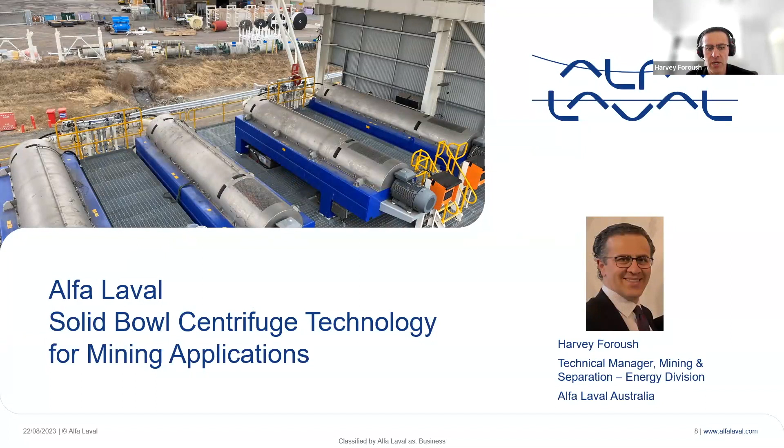Thanks, Tammy, and thanks, Austmine, for this opportunity for Alfa Laval to present our solid bowl centrifuge technology. Let's get started. My name is Harvey Foroush. I'm the technical sales manager for Alfa Laval Australia in the Energy Division. I'm based in Brisbane, and I will walk you through our technology for mining applications with a focus on tailings management.

Given the subject of today's webinar is focused on smart mining, I just want to walk you through how we can manage tailings in a smart way. You can either manage the thickener underflow for your tailings through Alfa Laval solid bowl centrifuge. In that case, you can recover more than 80% of the water and remove the solids from that slurry. Or you can do the traditional way and just pump it into a tailings dam. You can't recover the water, and you will lose a huge amount of water. It will add cost to the operation and also the rehabilitation of the mine at the end of its life.

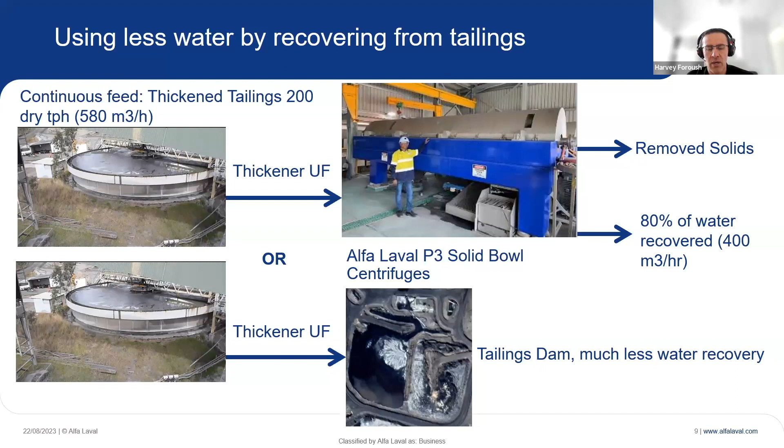So next slide, just a quick overview of the agenda today. Today's agenda will include focus on water and circularity for tailings management and how Alfa Laval centrifuge technology could help the mining industry achieve sustainability targets and reduce environmental impact. I'll walk you through a quick introduction about Alfa Laval, who we are and what we are doing in Australia and globally in the mining industry, what a solid bowl centrifuge is and how it could help the mining industry, the wear protection package in our centrifuges, and also our existing installations in Australia and globally. And at the end, a quick case story of red mud dewatering that we are doing at the moment in Queensland.

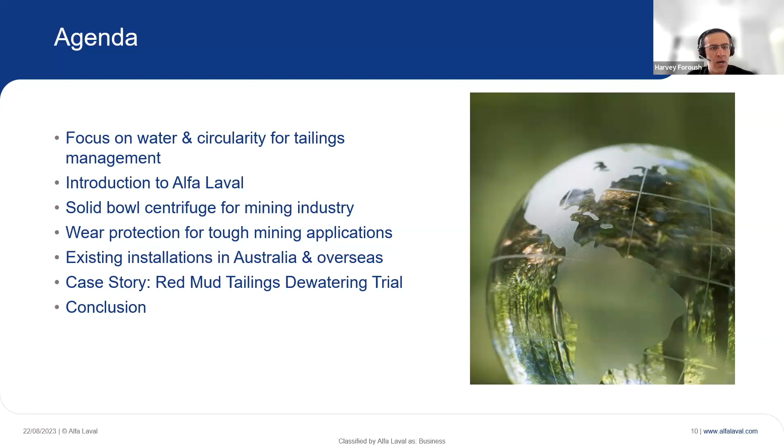So let's get started.

Circularity is on everyone's mind, and optimized water and resource management plays an important role in driving this transformation. Resource efficiency not only improves the sustainability of the operation, it can also be a smart way to cut costs and improve safety. Separation technology for tailings dewatering maximizes the reuse of process water. This is particularly important in areas where water scarcity is a growing problem. Better water management contributes to social license. We also need solutions for tailings ponds reaching capacity, as licenses for new tailings storage facilities are harder to come by.

Let me show you the latest technology innovation for better tailings management.

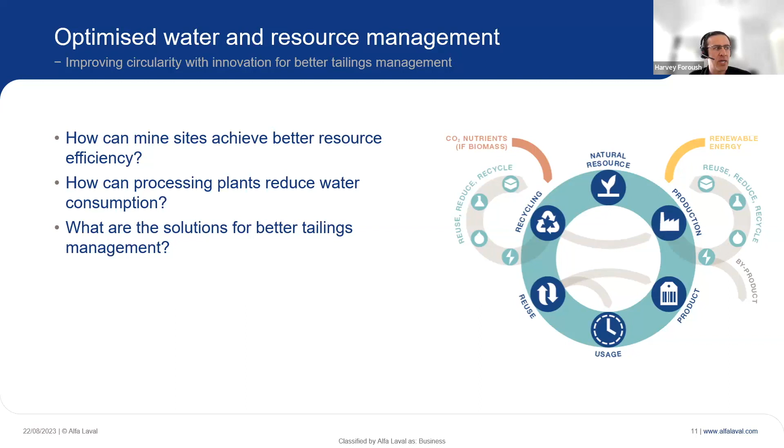So this slide is a quick introduction about Alfa Laval. We are a Swedish-based company. We've been manufacturing centrifuges for more than 140 years. Our centrifuge technology has a worldwide reputation for high performance, excellent quality, robust design, and reliability.

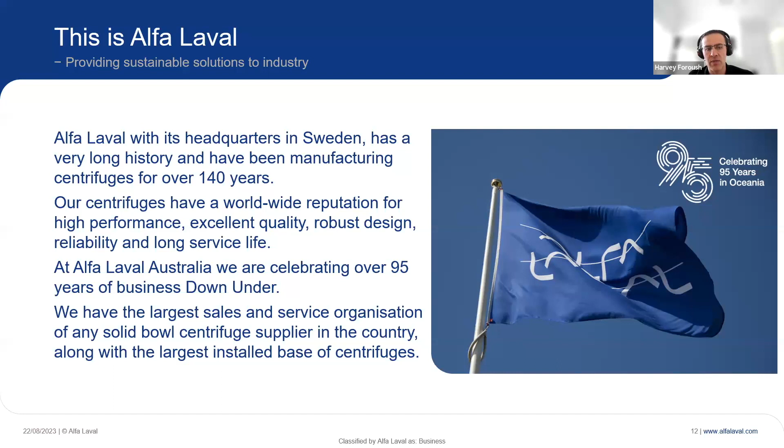In Australia, we've been celebrating our 95th year of business. We have the largest sales and service organization of any solid bowl centrifuge supplier in the country, along with the largest installation base of centrifuges.

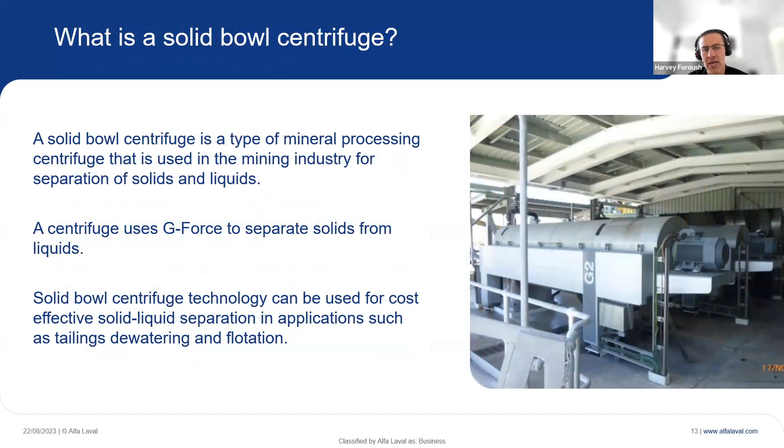So what is a solid bowl centrifuge? A solid bowl centrifuge is a type of mineral processing centrifuge used in the mining industry for separation of solids and liquids. It uses G-force to separate solids from liquid. Solid bowl centrifuges can be used for cost-effective solid-liquid separation in applications such as tailings dewatering and flotation.

We have our premium wear protection package for tough mining applications. It has been implemented on the feed zone where slurry comes into the centrifuge, on the bowl, on the screw conveyor where solids get separated and scrolled towards the solid discharge, and on the solid discharge end of the machine, as you can see on this slide.

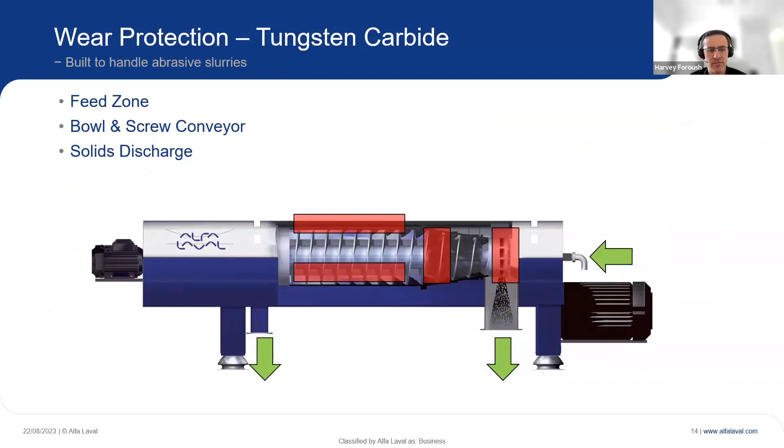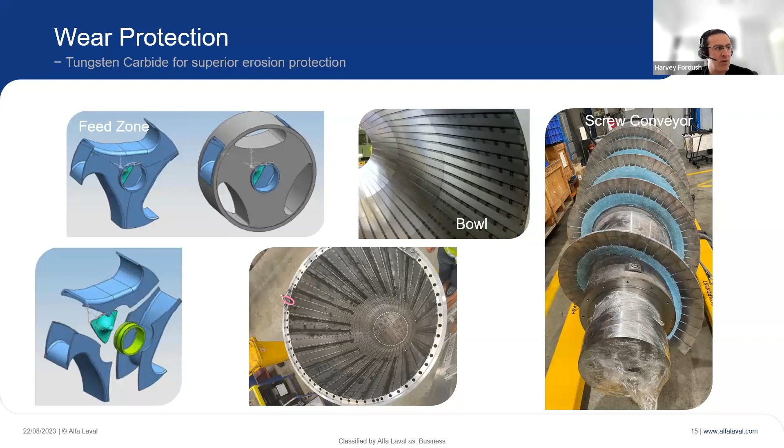In Canada, we have many centrifuges for exploration drilling in the mining industry that help recover the drilling mud in that industry.

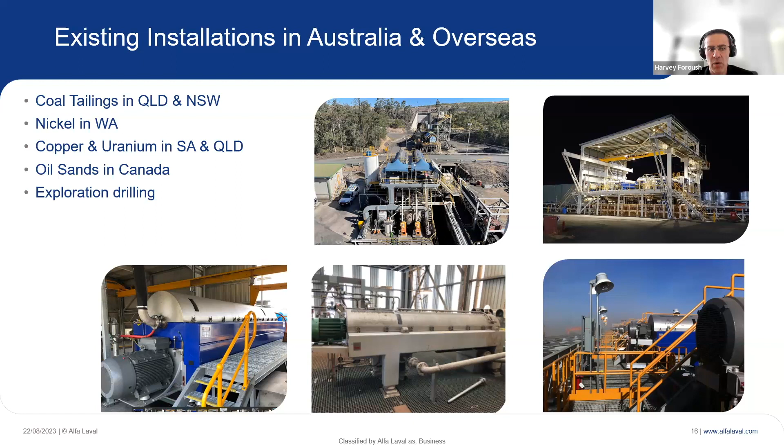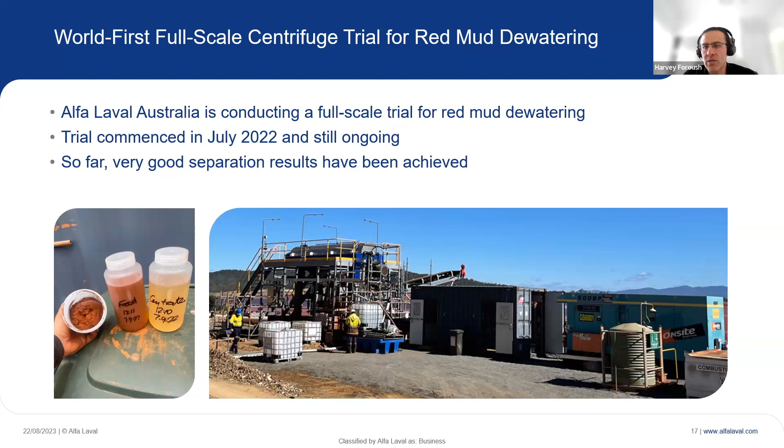As we speak, we are doing the world's first full-scale centrifuge trial for red mud dewatering in Queensland. The trial commenced in July last year and is still ongoing. So far we've had very good separation results, and we've managed to achieve the criteria specified by the customer so far. They are doing some more analysis on the centrifuge cake and also the centrifuge operation on site at the moment. All right, thanks Harvey.

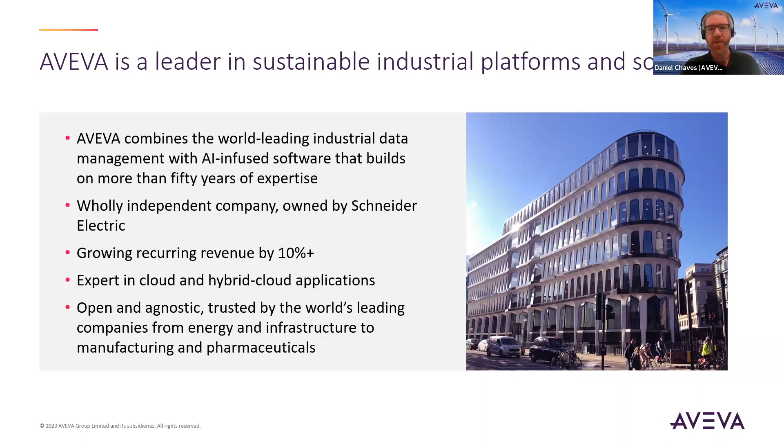This is just to show our commitment so far in terms of ESG - environmental, social, and governance programs. We are committed to helping our partners and customers achieve their sustainability goals as well. And these will be some of the use cases we see next.

Mining in the world has been using AVEVA for 25 years at least. So it's an impressive track record there.

This next slide is what I'd like to call the buckets of value. Usually when mining companies use our software, they classify their value and their goals and what they achieve, the results, into these six buckets. Today we'll focus on these two highlighted there: energy and water savings, as well as environmental health and safety. So you can see some of the use cases and the business outcomes people have achieved.

For example, real-time energy and water monitoring, as well as reduction of that, not only fixed plant but mobile equipment as well. Real-time environmental health and safety monitoring has to do with environmental reporting, license to operate, safety of people and the environment, accidents, incidents, compliance, and audit as well.

And this is the same topic in general - it's all about bringing the right data to the hands of the right people. Our customers are the ones doing amazing things with their data; we only enable them. We want to enable people to have digital solutions that get data from whatever source, put it in their hands, they embed their SME knowledge, and then they achieve those results.

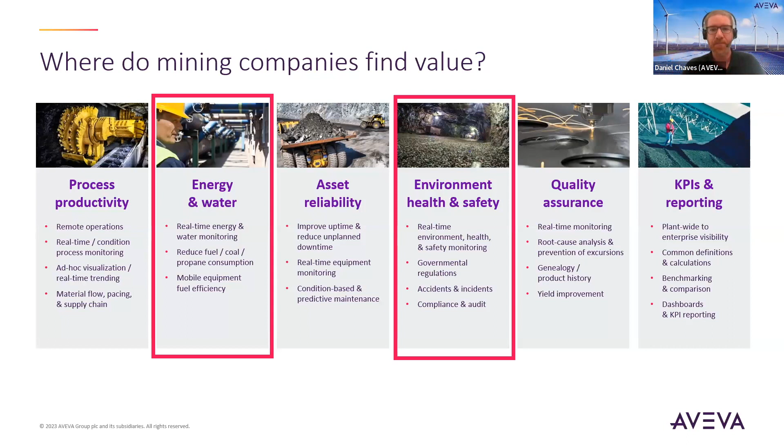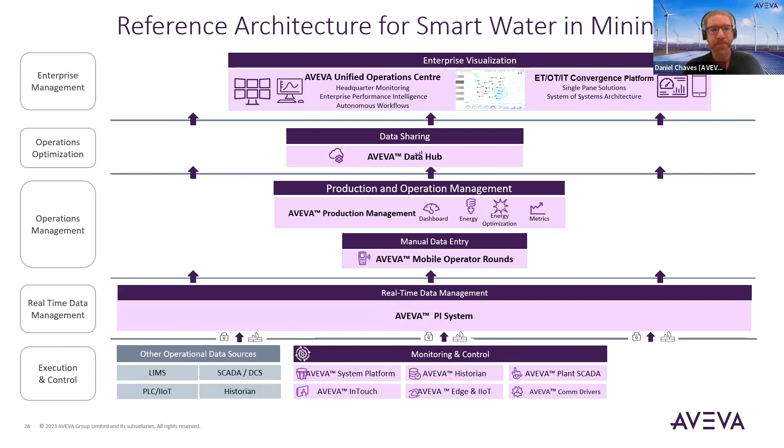So the first use case here: BHP had a need for a Google Maps-like environment. They had several systems, getting data from over 300 devices across 35 sites in Australia. The systems were everywhere, and they had different ways of monitoring them. So they decided to put everything - operational data - in conjunction with a map.

They used the PI system, and partners like Esri ArcGIS and Spotfire. Everything was integrated to provide them a single pane of glass - go to a map, go to one of the sites, click, get more information about the environmental data. They had really a Google Maps type of experience for their users, and they could report and stay on top of any deviations across their operations, in this case in Australia. As soon as an alert was received, they could act upon it.

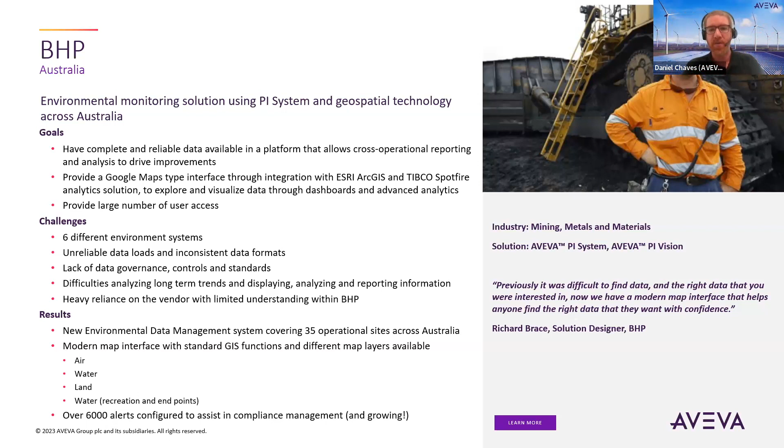So they didn't have much visibility traditionally - people were doing things manually, everything was done manually there. So what they did is put our solutions in place, and that time was reduced drastically. Everything was automated, and people could see the reports pretty much instantaneously.

Supervisors and the management could see those results, so they became very apparent. The deviations, they could act really quickly.

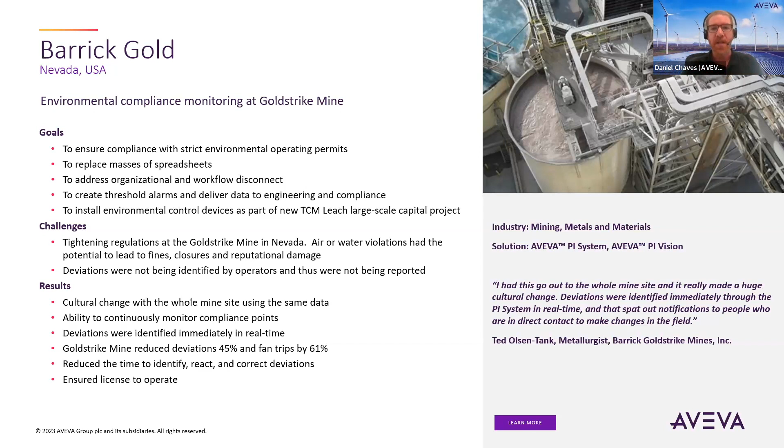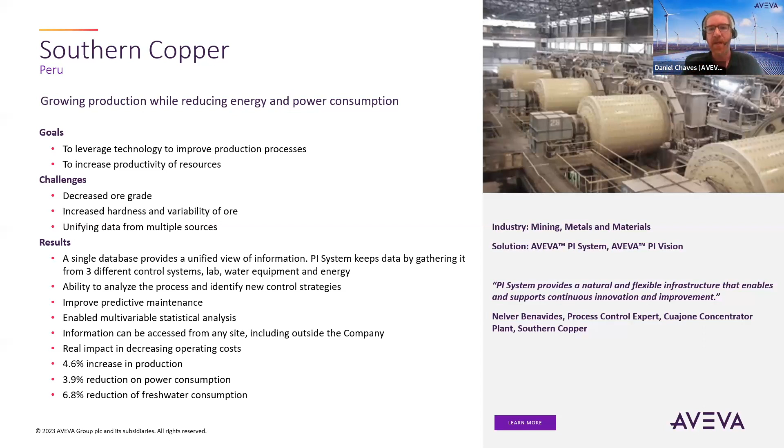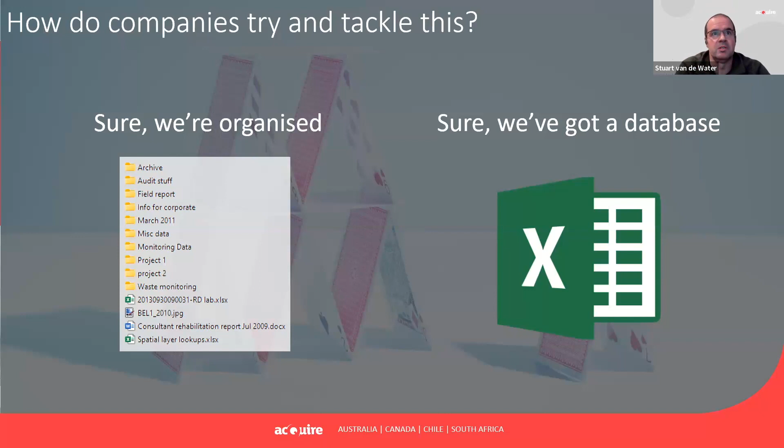So, what are the risks? I guess there are some challenges, but so what? Well, there are pretty big risks. These days, not managing your data well can result in increased risk of regulatory issues, fines, costly remedial work, and in even some extreme cases, legal charges.

Of course, let's not lose sight of the risk to the environment itself. Getting it wrong can lead to unidentified issues that can fester until some serious damage has occurred to waterways, land, and the air we breathe. It really does pose a risk to the people in your operations, and more broadly, the communities in which you operate.

One thing which isn't highlighted enough is the human toll. The challenges and problems cause significant pressure on those passionate environmental professionals charged with managing the environment on site. It's often an underfunded part of the business. We see high turnover and much stress and anxiety on those having to manage the requirements, requests and deadlines. And really, we are looking at suboptimal management of a limited and very valuable resource.

So how do we tackle these problems? That seemingly innocent question I asked earlier hopefully has a little bit more hair on it now, and maybe a few people in this webinar are starting to question what data they're actually looking at. Thankfully, there are some basic things we can look out for when we tackle these challenges.

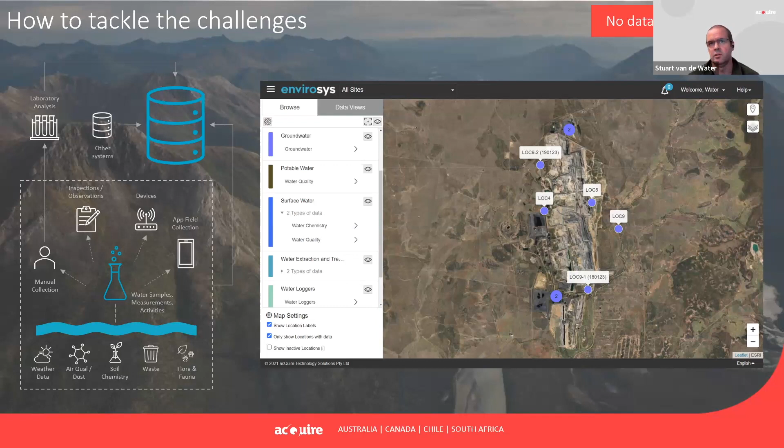You really benefit from being able to take into account all types of monitoring data to ensure you have a complete view of your obligations and your compliance. And when I say handle, not with a Frankenstein approach where every type of data is a different modular solution. You need to have this data, regardless of type, exposed through consistent and integrated interfaces.

You need to ensure all sources of data can be catered for. As I mentioned before, fields, labs, consultants, devices, other systems, all frequencies need to be handled. Whether it's 10-second real-time data or once-a-quarter sample analysis, ensure the less frequent data doesn't get drowned out by the very frequent. The key is to ensure all data is consistent and try to choose a platform which allows for ingestion of any type of data.

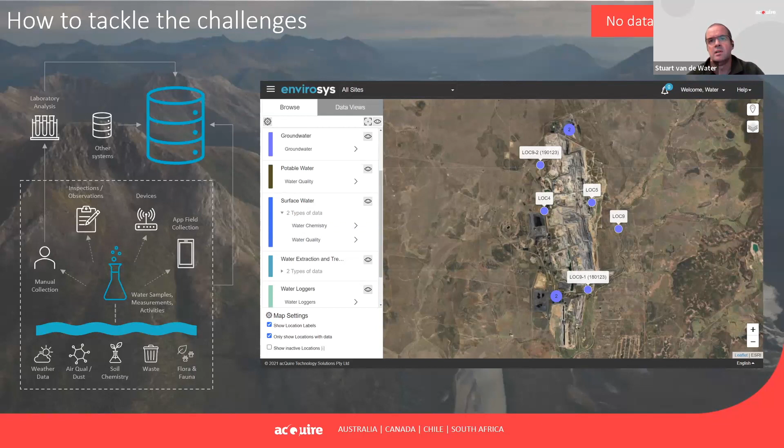Like the screen on the right, we've got all types of water data, but in a database which also supports air quality, waste, community, and even flora and fauna. If you don't, you'll end up with more systems, more vendors, more points of failure.

Compliance tracked in real time is really important. With a broad variety of data coming in and a different array of timings, you'll need to ensure compliance is being assessed as the data hits the system. And more so, if something is either anomalous or flagged, ensure alerts and notifications can be sent. The last thing you want is people having to log into the system to check everything all the time. We like to say the information finds a user, not the other way around.

So take the example on the right. The user logs in and everything requiring attention is on their landing dashboard, not to mention the emails and messages that would have been sent to them with compliance issue notifications. Trying to fast track this feedback is vital to get out of the cycle of third parties providing such insight after the fact, when it's too late to respond.

You need to ensure you're receiving this data in a timely manner and let your systems and staff perform assessments and really take ownership of your compliance feedback. Imagine finding that your routine water testing highlighted a significant issue, but you've just found out about it in the monthly consulting report after the fact, and it's too late to do something about it. And that's a true story.

Compliance is completeness too. So you've got your no compliance issues, you can find all your data and you can use it, but is it all there? Has all the monitoring been performed, all the activities been done? Has the data hit the system? A lot of compliance conditions start with something like: you must perform regular monitoring in the following locations. So ensuring data set completeness and compliance with your obligations needs to be a core part of your thinking too.

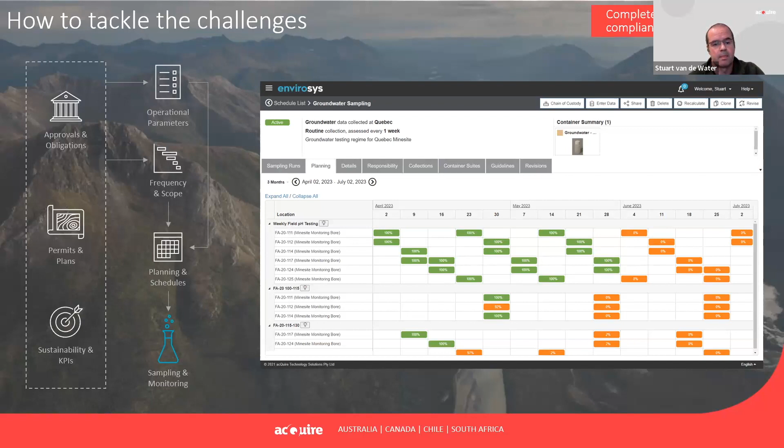To wrap up, hopefully I've given everyone a little bit more to think about when they consider that simple question at the start: do you have the right data? Do you have all the data? Do you even know what all the data means? Can you use it right here, right now, without having to spend countless hours procuring, compiling, and wrangling to get the answer?

Systems like our Envirosys database do help with a lot of these, along with the processes and people, to form a really solid platform in meeting your water data management, as well as all of your other environmental data management needs too. And that's your answer to the question: are we compliant right now? And you can prove it. That's me.

Great presentation, Stuart. Thank you very much. I love that hashtag, no data left behind. That's pretty good.

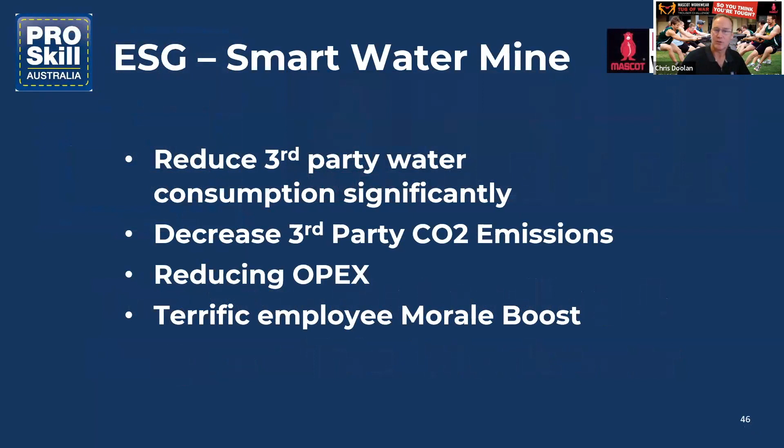Over the next 5 minutes or so, we're going to be showing you how we can reduce third-party water emission and consumption significantly, third-party CO2 emissions, reduce operating expenses, and deliver a terrific morale boost.

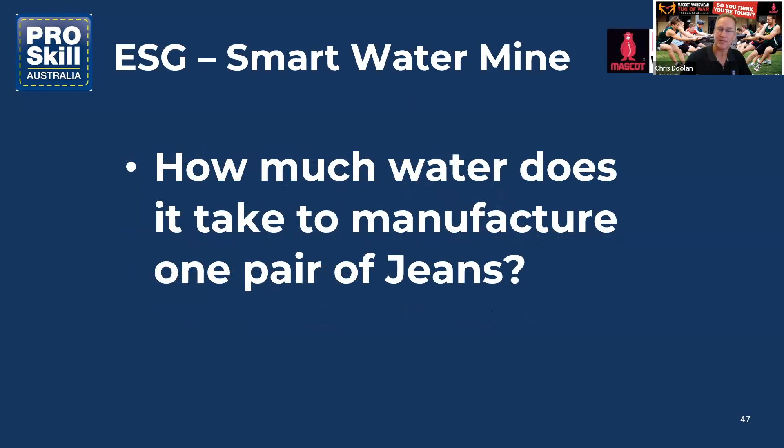So how much water does it take to manufacture just one pair of jeans? Feel free to put in your guesses in the chat, because what we're finding is about 99% of people don't know. The answer, according to the UN, is 10,000 litres of water to manufacture one pair of jeans, which is a phenomenal amount.

This shocked us for many years, until we found out when we were requested to do a presentation at a waste and recycle show over in WA, government and councils. We were completely shocked, and for 3 to 4 months we went around the world to confirm this information was correct. Unfortunately, it was.

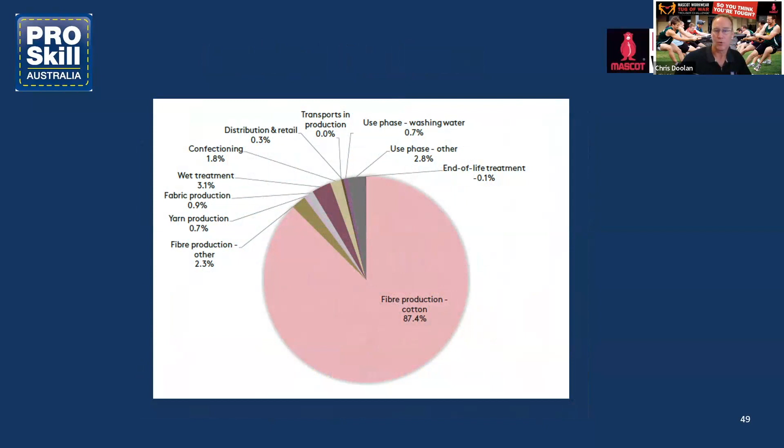The main place where the water is used is the growing of the cotton, and you'll see the issues we've got in New South Wales with respect to growing cotton, in places around the world that could do with the water rather than the cotton. On top of that, there's a CO2 impact - about 8.5 kilos of CO2 to manufacture just one pair of jeans as well.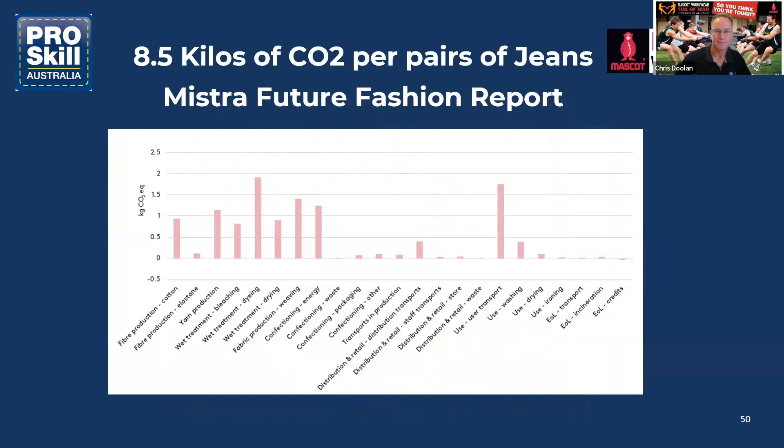So what makes us different? Firstly, Mascot Workwear from Denmark, Scandinavia has a high respect for the environment, and we're the only workwear in Australia which is Accounting Standard 8000 compliant. Moving on from that, what is the number one priority with respect to the circular economy? Longevity. It's certainly not recycle and dispose, which unfortunately is what we've become over the last 30, 40 years of disposable society.

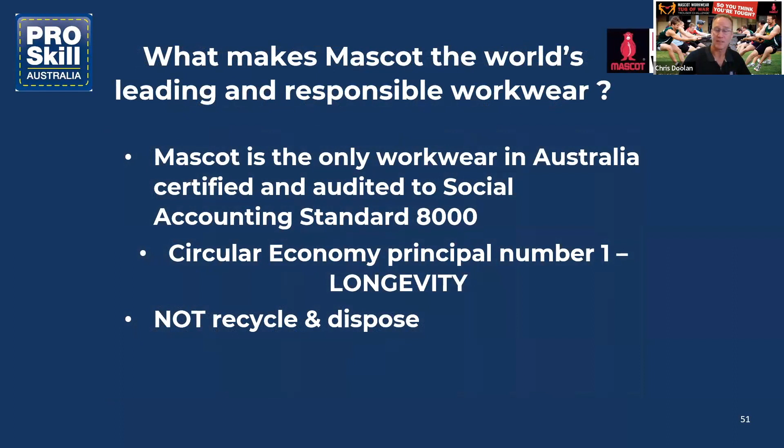We're also getting the same results in the global wind industry as well, which is just absolutely inspiring. We've got a lot of the global wind industry and the technicians that you can see hanging there throughout Australia and the world in this. The reason they go to it is because it just does not know how to wear out.

So is the mining industry any different? We presented this information at IMARC last year, and we got a lot of interest, including Phoenix Linings, who came to us and said they have got a serious problem. Consequently, we fast-tracked getting road testing going.

As at the 1st of February this year, we started road testing with our pants with a couple of road testers there, and these guys are full on. It was hard to get information and work them just because they were working so hard, but we got the road test started. Surprisingly, they went through pants effectively every 2 months.

When we started the road test with the pants we gave them, as at the 1st of February, now they're still as good as new. Not only that, but they've actually been using them instead of once a week like they used the other pants - they use our pants 2 to 3 times a week. So if we say that's 2.5 times by 6 months, that makes it 15 months, whereas the other pants only lasted about 2 months.

So it's phenomenal savings, and here's the results we've got so far: 5 less pants purchased, and still increasing because the pants are still going. That means $500 saved per pair of pants, 50,000 litres of water, and 40 kilos of CO2 saved, and still increasing. Otherwise, if nothing was done, that would all be wasted.

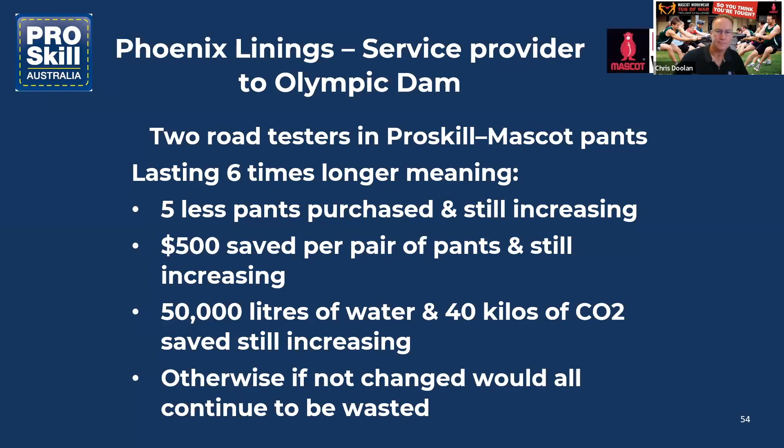While it is coming in - Victoria University actually did a desktop audit, and they went around the world to find out if anything like this existed, and it doesn't. So what you're looking at is world leading, and it is pretty exciting, but also daunting at the same time. It means no one is tracking the true cost of workwear, which is very scary.

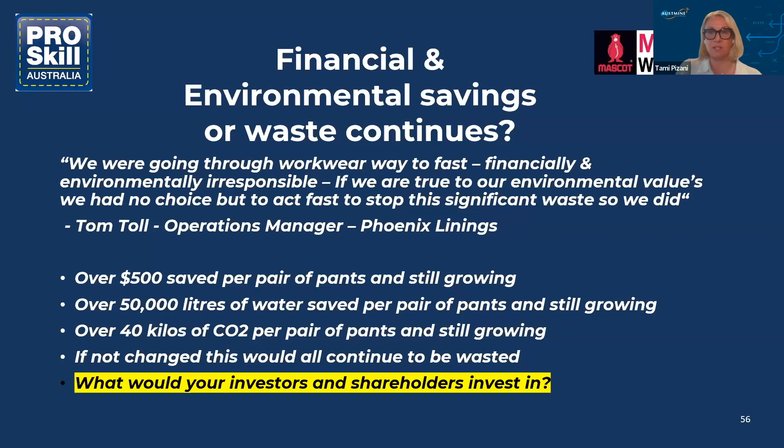Morning, everybody in West Australia. Anybody else that's probably a little bit past midday. My name is Mark Keogh. I'm the chairman and founder of UON.

UON is a West Australian integrated energy company committed to energy for every future. If we're serious about ESG, we need to understand energy, the use of energy, and the creation of energy. So basically, UON was founded on delivering solutions designed and manufactured for Australian conditions. We operate in an environment which is extremely harsh, and we build our equipment to suit that environment.

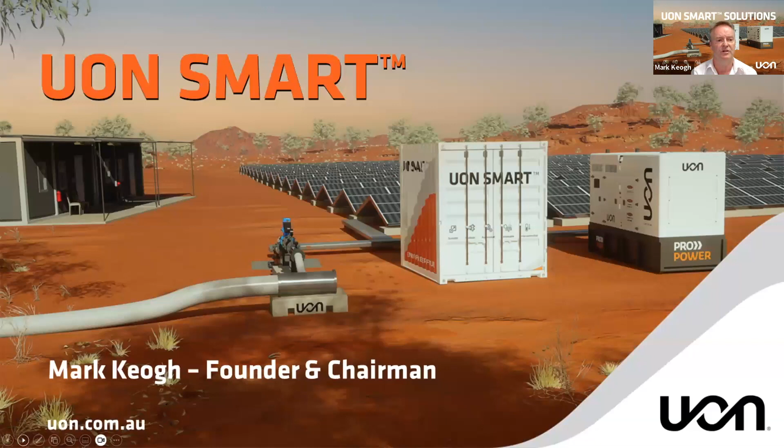Over 20 years, we've continually created innovations. We are an OEM, an original equipment manufacturer of products to support our clients' needs. We've now seen a transition to hybrid renewable solutions, and through smarter, more reliable energy and water management solutions, we're going to integrate a decarbonizing journey and the technologies associated with that, which will reduce the OPEX and the CAPEX.

So I'd just like to introduce and play a short video there that might explain the landscape that we operate in over in West Australia.

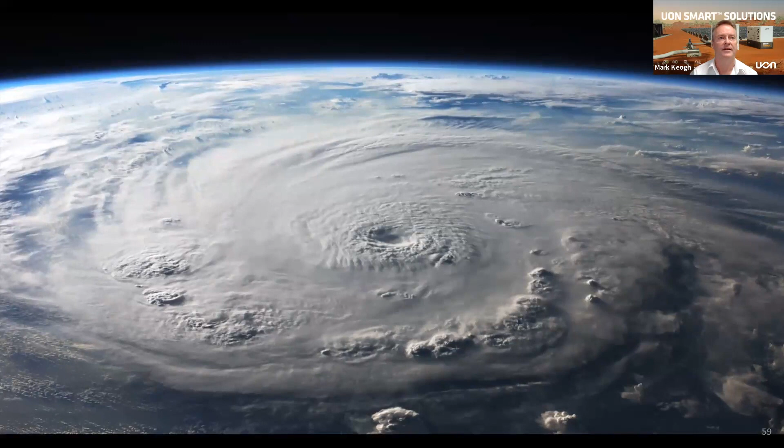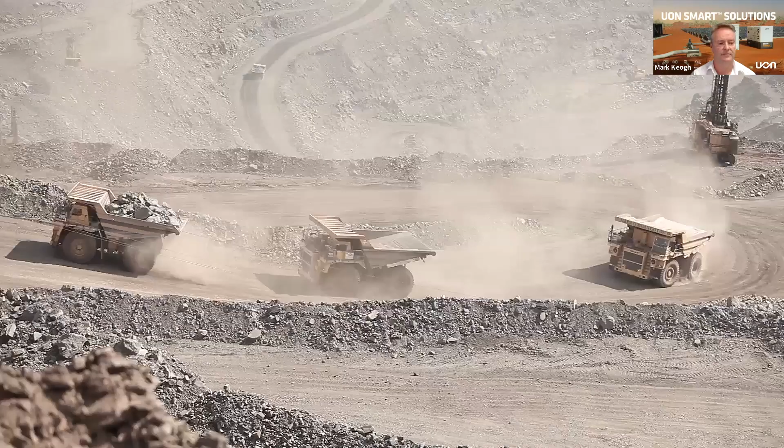We're living in uncertain times. Harsher weather conditions and energy security are impacting us all. Future miners will look to invest in a proactive vision of the future. The reality is that nobody knows what the future holds. Whatever lies ahead, mining will need to be more resilient. New technologies like automation make mine sites more efficient, reliable, and secure. But how automated is mining?

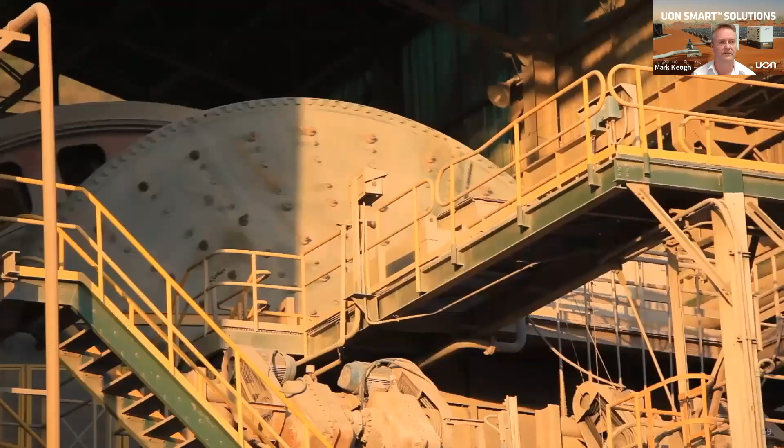Mines are getting deeper and bigger. Temperatures are rising and demand is growing. What if your energy production fails and your operations come to a grinding halt? How much will that cost your business? For 20 years, UON has witnessed these challenges. Now, we've created a solution. One that promises to reduce your CapEx and OpEx drastically.

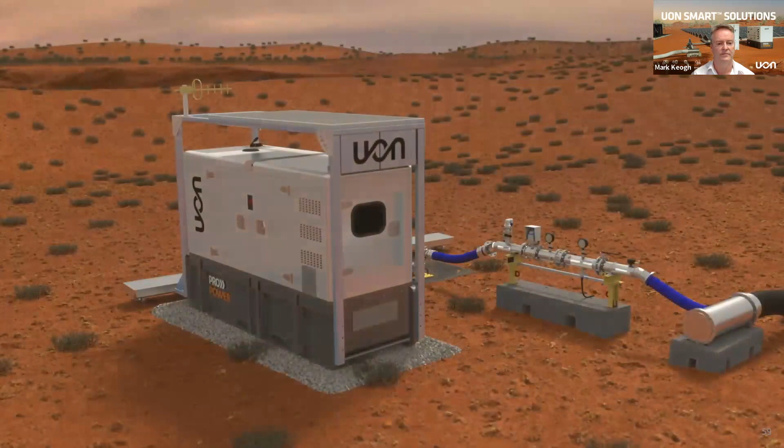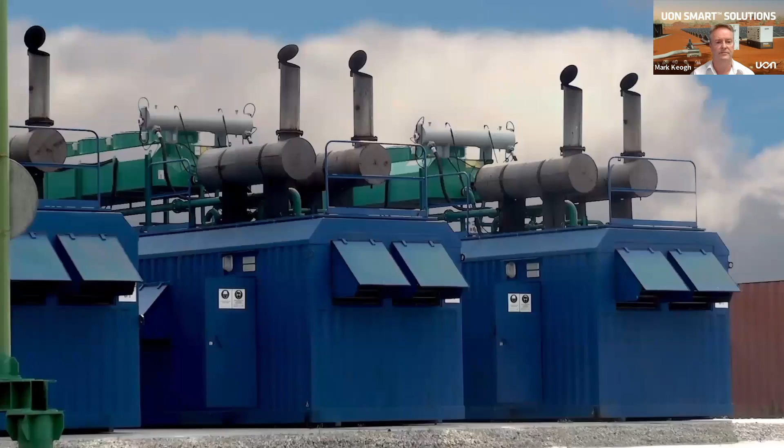UON Smart is changing the game. An end-to-end standardized energy management system that integrates people, data, and technology. It's scalable, modular, automated, renewable, and temperature controlled. UON's GMC generators take away the cost of additional equipment. Fuel use and carbon footprint can be reduced even further using renewable energy storage. Your camps and operations can be 100% off fossil fuel reliance. Solar, wind, and batteries supply power. Fossil fuel becomes the standby. Multiply these efficiencies over your global operations and savings multiply exponentially. Your carbon footprint will reduce year after year with less fuel transport and less maintenance.

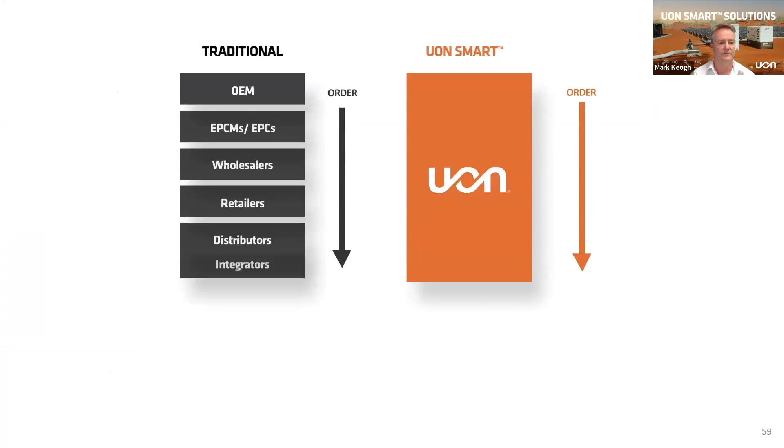How have we done it? UON Smart is a vertically integrated solution. We've taken control of our supply chain and developed our own products. And because it's simpler, it saves more in money and time. Success in the future is about being smart and fast, anticipating and adapting to change as it happens.

UON is your plan for the unplanned. Whatever challenges come your way, we'll keep you on. We'll keep you operational. UON. Energy for every future.

So that's just a short video of the landscape that we operate in. When we talk about UON Smart and moving to that transition for renewable energy, it really does require an understanding of the systems and the processes. We're based in Western Australia. We design, manufacture, test, and produce industry-leading solutions, fully supported and maintained for our clients. We also train people for this new journey we're all going to go on.

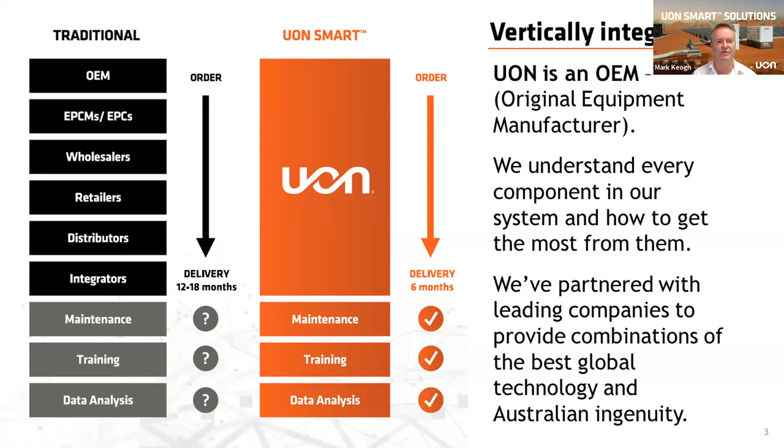We can extract data or provide data to record performance and continue to improve its operation. UON Smart is effectively a bespoke solution that's been designed and developed off the shelf. It's scalable, modular, automated, renewable, and temperature controlled. The current solution we've created is the UON Smart Cell.

The Smart Cell integrates patented technology. It creates a solution that's off-grid for off-grid applications, but also for on-grid applications where the grid itself has limitations by way of the power available through transformers and distribution. It can significantly reduce your CapEx and OpEx, and it's suited for renewable-based dewatering applications or standalone power systems, or, as we see a transition to EV vehicles within mining sites, it also has the functionality of EV charging.

Traditional generators, which are predominantly the main source of carbon produced in mining, are effectively used as a standby or backup. Most mining applications operate on a 24-hour basis, so the solution is designed to work on a 24-hour cycle.

So what are we looking at here? To do nothing means there's an ongoing cost to the bottom line, not only in carbon but also in the cost of diesel. If you swap out to one of our GMC solutions, we can save you between 5 to 30% on traditional diesel fuel generation.

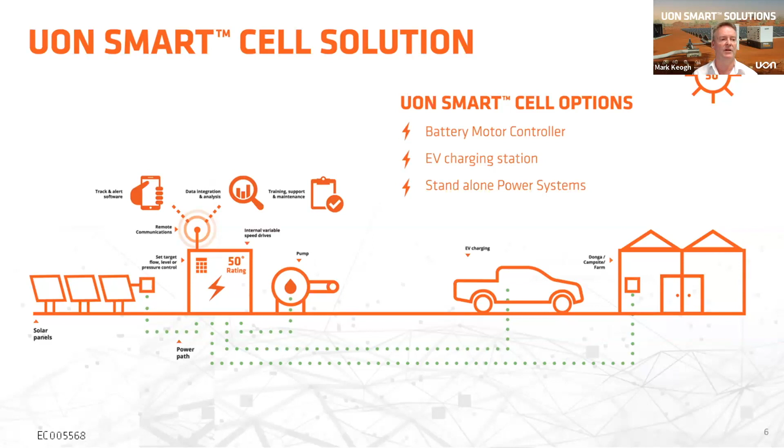We took a snapshot of what one submersible pump operates on a mine site, which in effect is about 145 kilowatts over 3 years. Based on $1.38 for diesel fuel, which after subsidies is what miners have been paying on average over the last year or so, the bottom line saving on the system is $940,000 in fuel saved.

So you're well into the value chain from that point on - it's significant value for you. From an environmental perspective, for that one pump it's over 1,842 tons of carbon saved over 3 years. That's a 3-year payback period, which is the bottom line for most mining companies. But at the same time, they can meet their ESG journey right now with solutions that are designed, developed, and ready to displace this carbon and water as required.

Thanks, Tammy. That's pretty much it for me and for everybody out there. Energy for every future is what we've all got to be looking forward to.